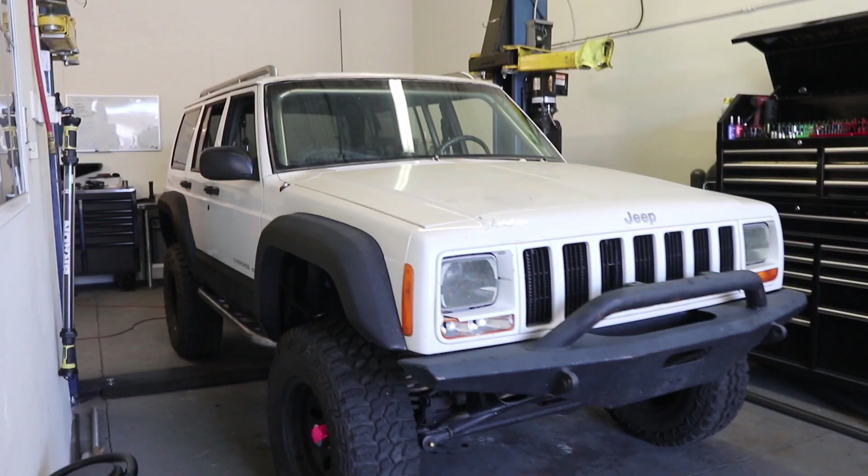Let's check this thing out. Here's a little teaser of what's done so far. I wanted it to be low key, looking like a roof rack from the front, so when you roll up to checkpoints it's pretty discreet. Underneath, everything's tied in through the floor, straight to the frame, welded to the pinch weld.

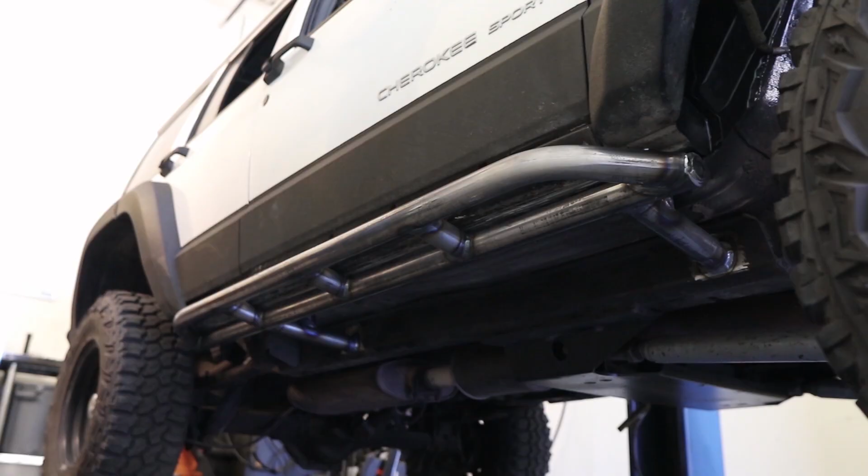If you're not familiar with the Cherokee, full skids, long arm, frame stiffeners front to back, and that's what those rear A-braces are tied to. Then up front, it's a little more traditional with A-pillars and a dash bar.

This is the Cherokee that we did the entire perimeter of Mexico in. All the way to Cabo, all the way back, all the way down mainland, Mazatlan, Acapulco, all the way around the point, came up through Cancun, back up the Gulf, and back in through Reynosa. Took about 3 weeks, and this was the perfect vehicle for that trip. I couldn't have asked for anything more. Maybe a little more creature comforts like AC, but nevertheless, here it is.

We can go over the backstory another time, but regarding this project, we're gonna cage it. So we're gonna tear it down and build it back up from scratch. And I thought it might be useful to go through some of the really high level decision making and fab stuff while we do it.

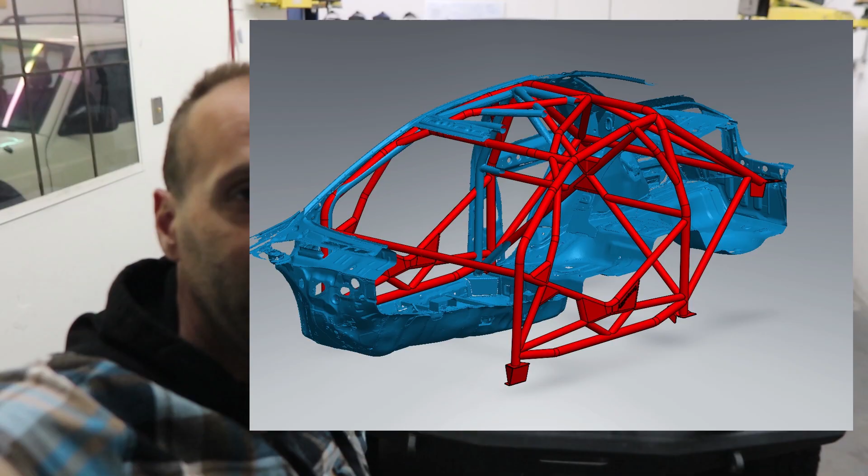This is a really important point that I think people don't consider. If you're gonna cage something like this, it's really important to think about what you're doing. If you're gonna drive this on the road, are you going to put a 5-point harness on every single time you get in and out of this? And if the answer is no, the cage will kill you faster than it's gonna save you.

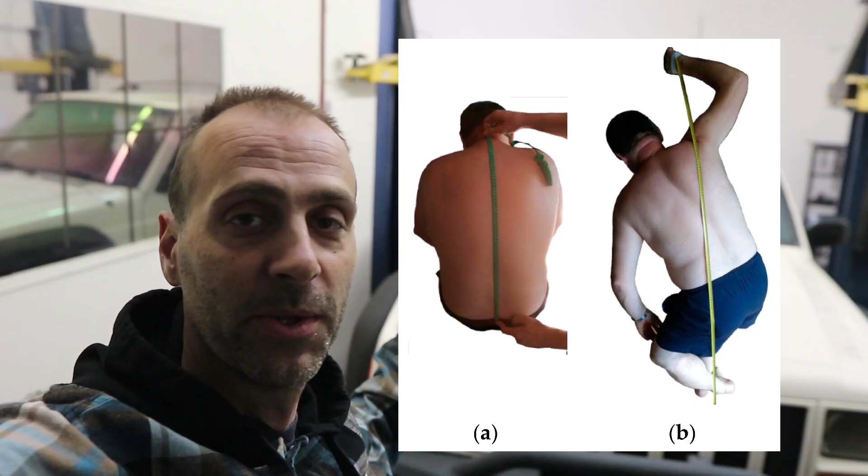Second, if it's not for any specific race, there's no spec for the cage. And so that means, where do you put the main hoop? What do you tie it to on the floor? What size tubing? All of that. We'll go through sort of that decision-making process. Depending on what your experience is, you're going to want to start with a simple Google search. Determine what sport most closely represents your activities, and just start digging.

Maybe your car is kind of like rally, then according to this website, they want their cages to MSA or FIA spec. Maybe you're looking to go really fast in a straight line, then you'll probably end up with this SFI spec. And by far, this is probably the most ubiquitous. The way that they break down their classes is by ET and weight. So basically how fast you're gonna go and what the car weighs. So now we're on to something. So for the Cherokee, we'll probably end up being more than 3,500 pounds, but less than 5,000. So we would probably want to pick this one.

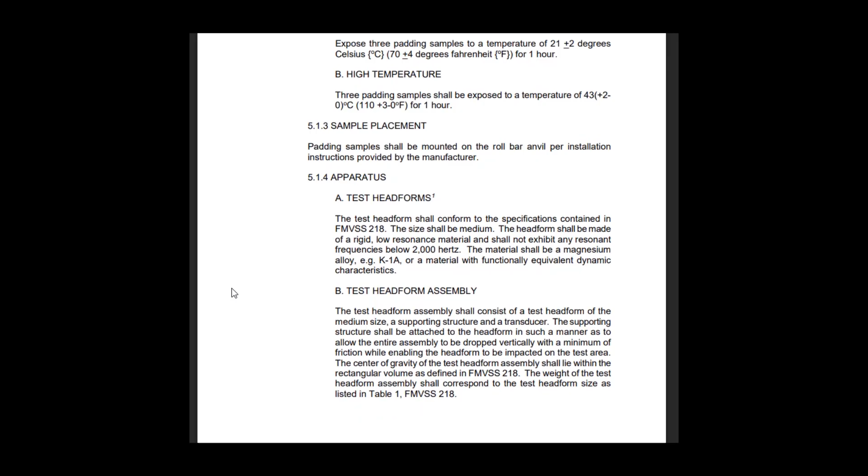And what I mean by digging is just start consuming this stuff. Get familiar with the terminology, what they're trying to accomplish. For example, this particular document talks about the padding on your roll cage, but it's geared towards manufacturers making products, so it's off the deep end, which is kind of good for learning. It's got things that you wouldn't consider, like when your car lights on fire, what kind of materials to use, how hot does that fire get, all kinds of stuff.

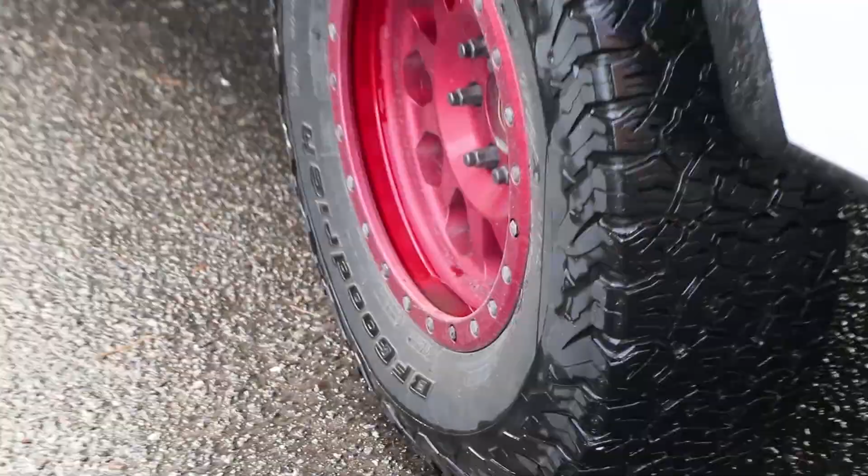Alright, for me, my activities most closely represent desert racing. Not that I want to build this thing to go fast. What I want to do is have a look at future in case I want to add tubes later to bring it up to a higher speed. Even though they're for trophy trucks or really fast classes, this is where I want to start and dial it back.

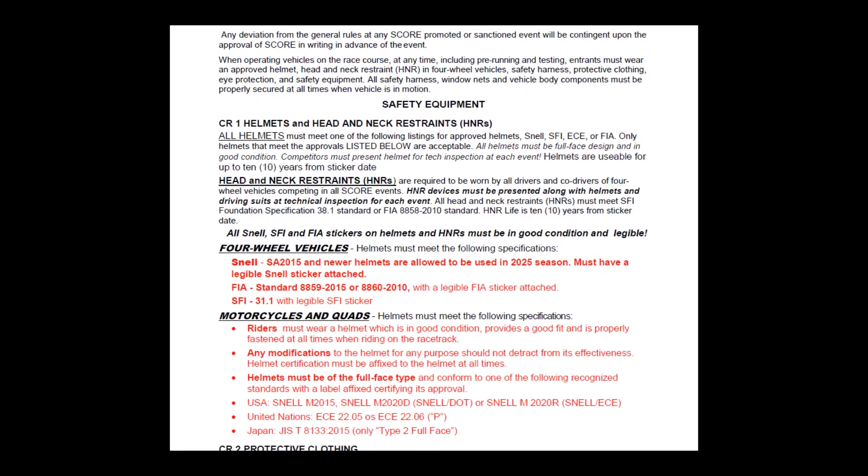So here we're looking at Score International's website, and I'm looking for the competition regulations for 2025, and then you can scroll down to the roll cage section, which is CR33, and let's see what's in there. Some really awesome guidelines in here. A lot of general knowledge. Big debate about what material; continuously drawn seamless or drawn over mandrel tubing is required. MIG and TIG only. Here's an interesting one for chromoly. Heat treating is strictly prohibited, but stress relieving is encouraged.

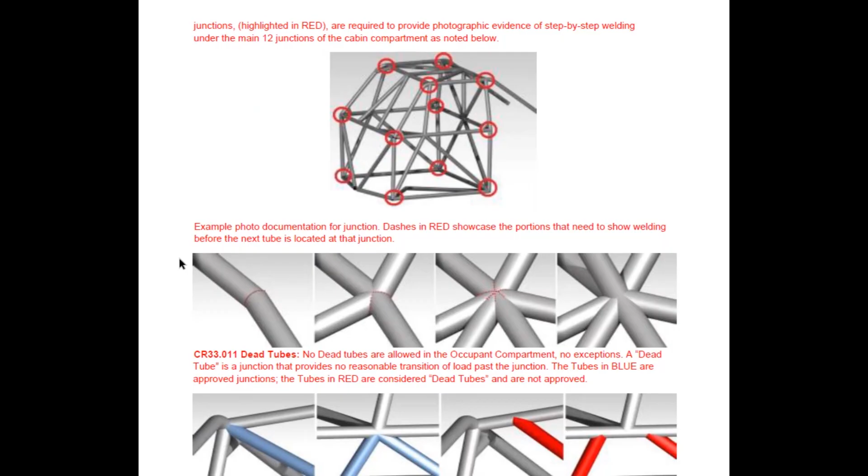Not that any of that's really of consideration for the DIY guy, but here's where it really starts getting interesting. This is the design fundamentals for the passenger compartment. Clearly defining the bubble around the passengers as the passenger compartment, talking about weld order. Here's a very good one for what we're doing: no dead tubes allowed. And in the middle of the screen, you can see what they mean is all tubes must end in a junction and not in the middle of a tube. And then they go into further detail talking about how to structure it.

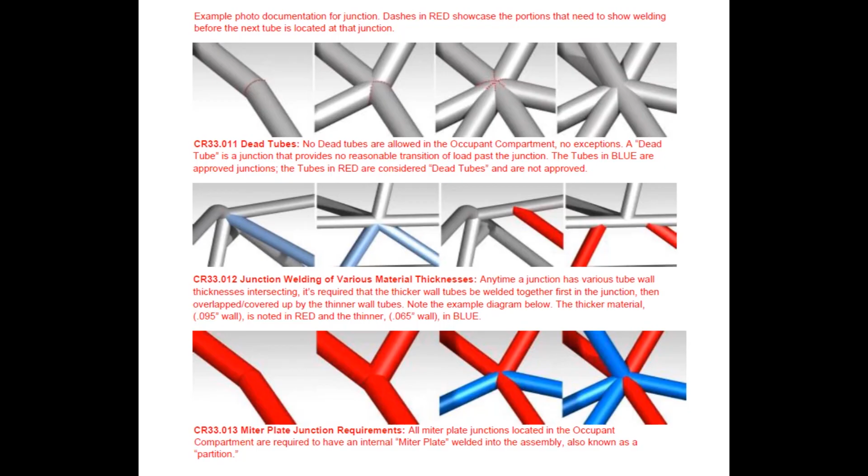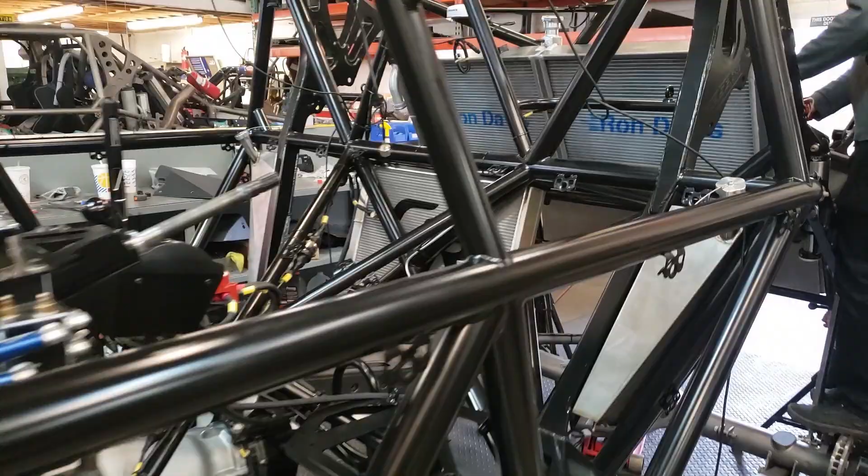You can have different size tubings in the junction. So if we fly into a Geiser truck without the cover on, you can see no dead tubes. Everything's triangulated, everything's into a junction. Another thing you'll notice is no bends. So now everything's mitered, laser cut, replaceable. And if there is a bend, it has to be mandrel bent.

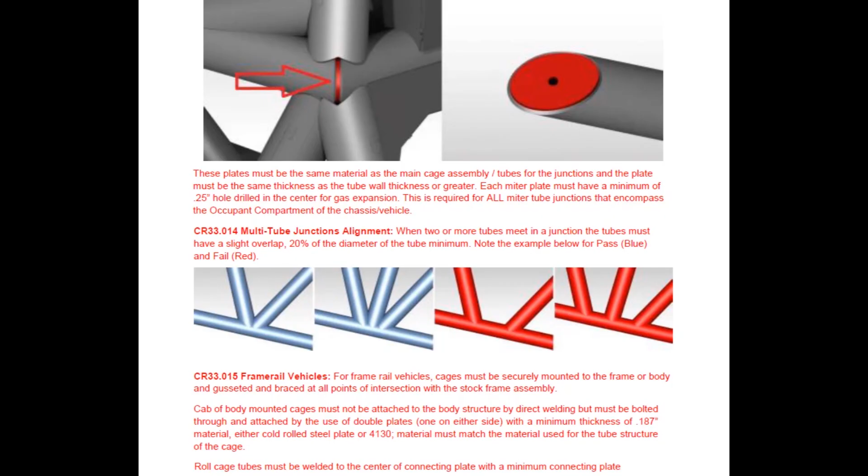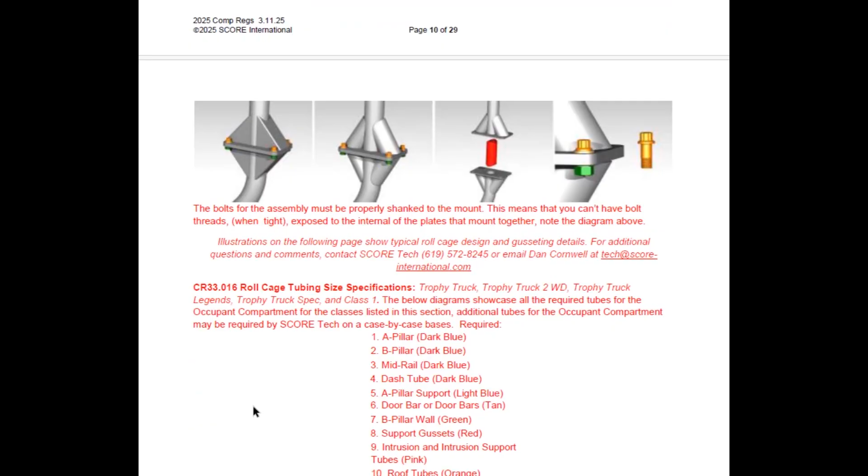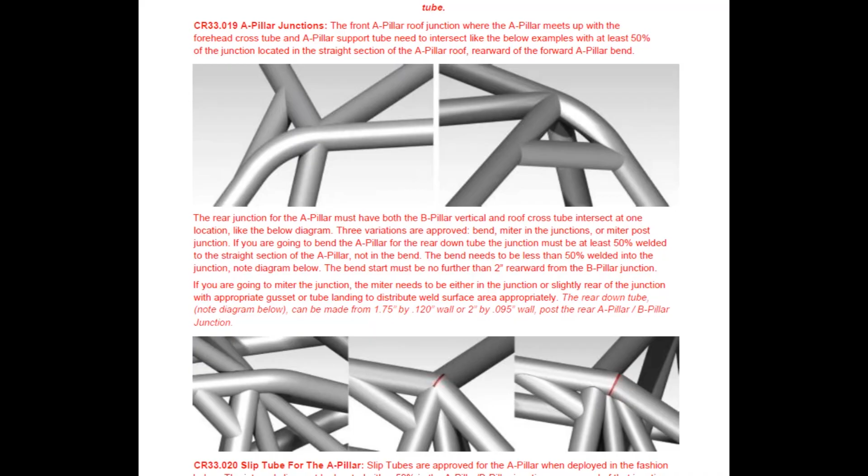So it's pretty easy to see that the standards are going way, way, way up. And that's why you see things even being spec'd inside of these miter joints, tube density in the junction, connection specifications, standardized tube names and thicknesses, what bends are allowed and some being mandatory, and if there isn't a bend, how to deal with it. Mid-rail junction specifications, meaning if you have to connect tubes together, how to do it with a slip tube and rosette welds. A-pillar supports are now mandatory for SCORE.

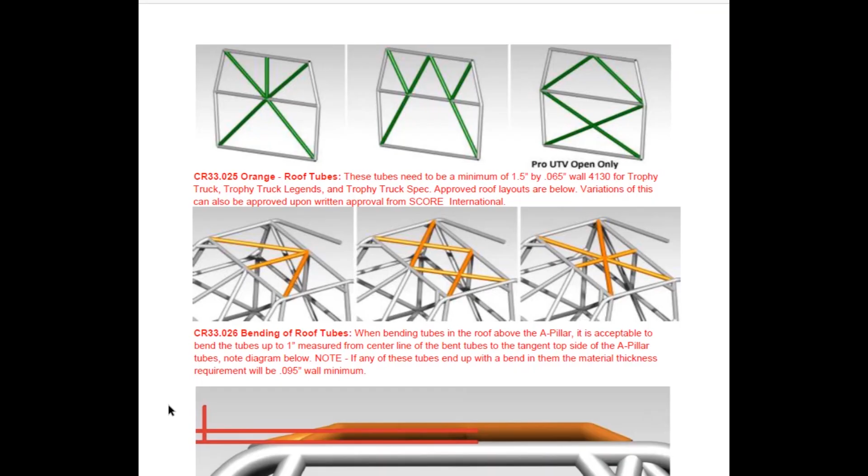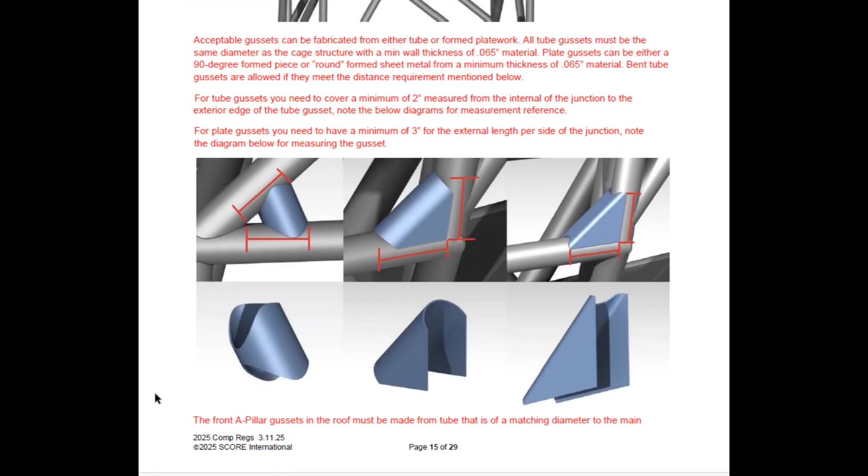Door bars. Here's the fundamentals for intrusion. Maximum bends for head clearance. Gusseting, which type of gussets are allowed and where they have to be. A big reason why all this is coming down the pipe is speeds are getting faster and faster. It doesn't take much skill to go fast. Hit the skinny pedal and hold it. The skill really comes into going fast while not killing yourself.

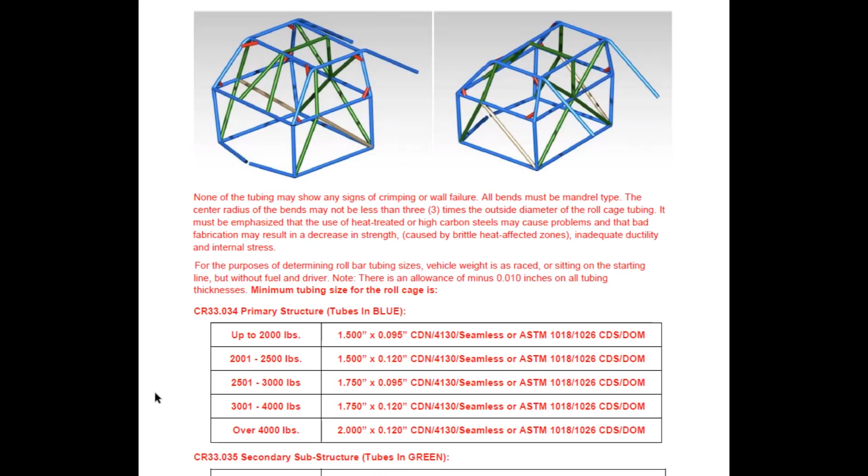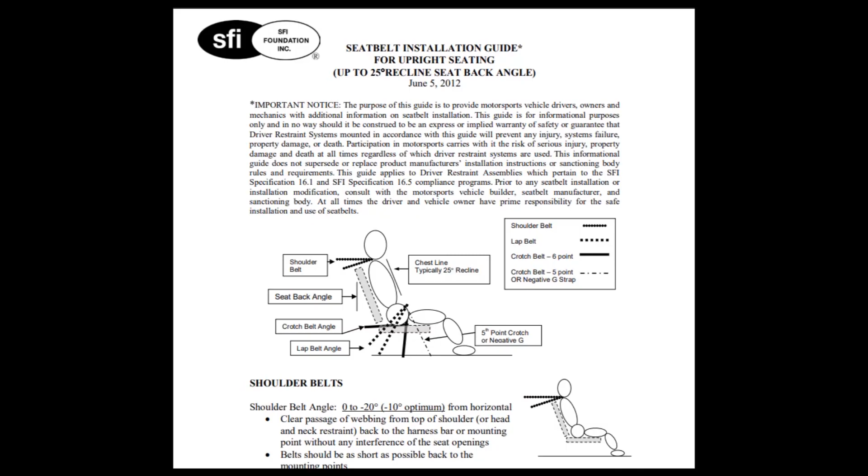So let's just keep in mind that this is the gold standard, okay? This is what the future looks like. This is what's coming down the pipe for all cages. 2 inch is now standard, no more 1 3/4, no more bends, everything's mitered. Then the final thing to take from this document is coming back to the SFI spec for harnesses. In that spec, they've done a really good job of outlining the maximum angles and lengths and also how to tie and attach the harnesses. Come back to that. That's one end of the extreme.

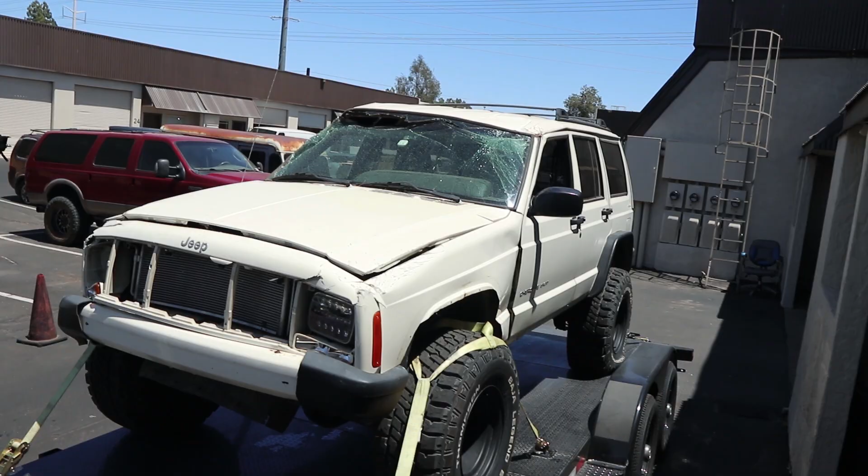What if you don't have a cage at all? I bought this Cherokee for parts. What can we learn from it? In terms of severity, they did pretty good. There's not one panel on this that's not crushed. So it's not like it just flopped over. Every single corner on the roof is crushed. Corners of the hood are smashed. Even started to fold the body. None of the doors close right. The rear hatch is buckled.

Front fenders are killed. So the important thing to take away is they walked away from this relatively safely. And they almost drove this thing home. It lost a lot of fluids because it was laying upside down. So they ended up towing it, but this thing will drive on and off the trailer, no problem.

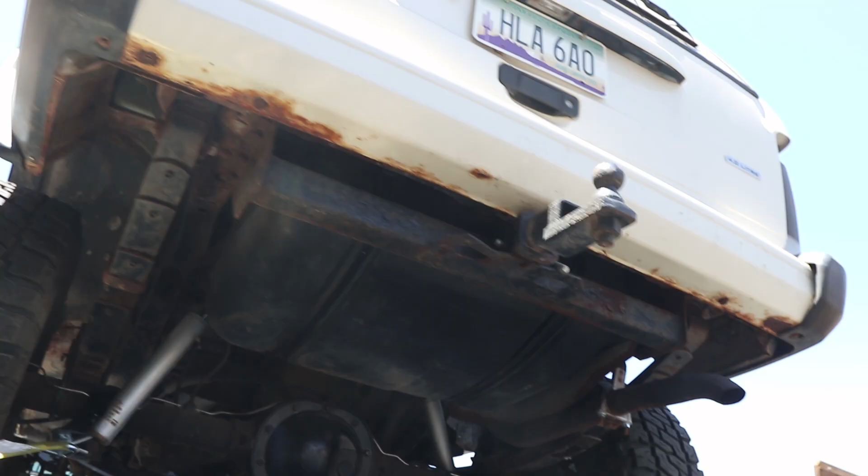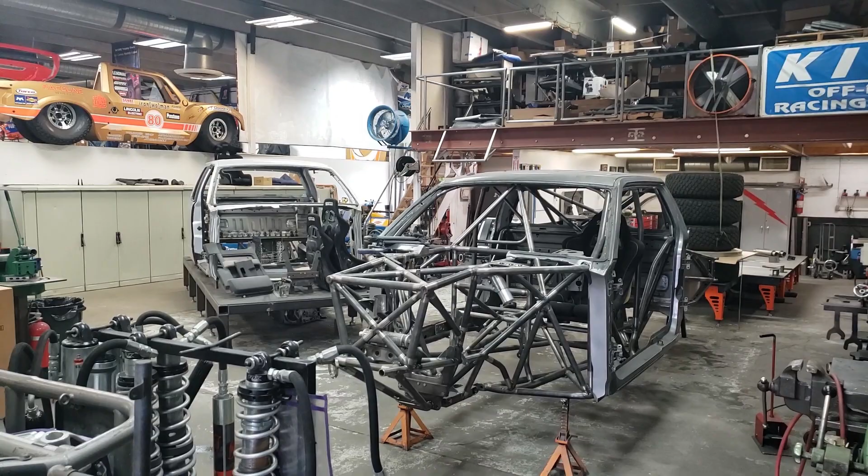So in the last couple minutes, let's talk about in between those two spectrums, and that's going to be looking at pre-runners. Why? Because they have the freedom to do what they want without a race spec, but still keeping safety in mind while making reasonable accommodation to keep it functional. Again, back at Geiser, here is the template for a race truck, but inside the steel cab is a bunch of bent tubing and dead-end terminations.

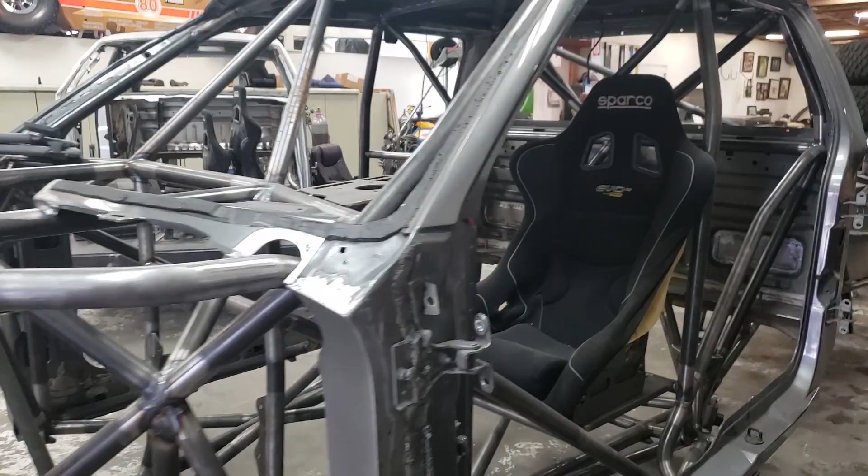So anyway, the takeaway is that there are best practices. We could follow the race guidelines to survive a 150 mile an hour crash. But at the end of the day, we got to do what we got to do to get it fully welded inside the truck in a way that's not going to kill you if you get into an accident if you don't have a 5-point harness on.

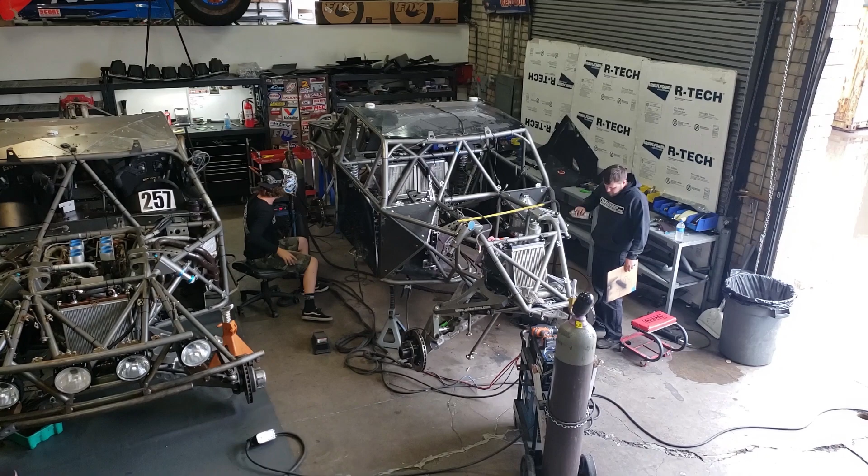So if that didn't make your eyes glaze over, stay tuned for episode 2 because there's still some time. We didn't even get into any of the footage talking specifically about this vehicle and why I chose the design or how it ended up or what's left unfinished. So we'll cover all of that in episode 2 and we'll end that one basically where this sits today. Why those A supports aren't triangulated. We'll talk about that impossible Z-bend in the A-pillar. Why the roof looks like it's some kind of a truck thing. Why I feel okay about that. Let's cover all that in episode 2.